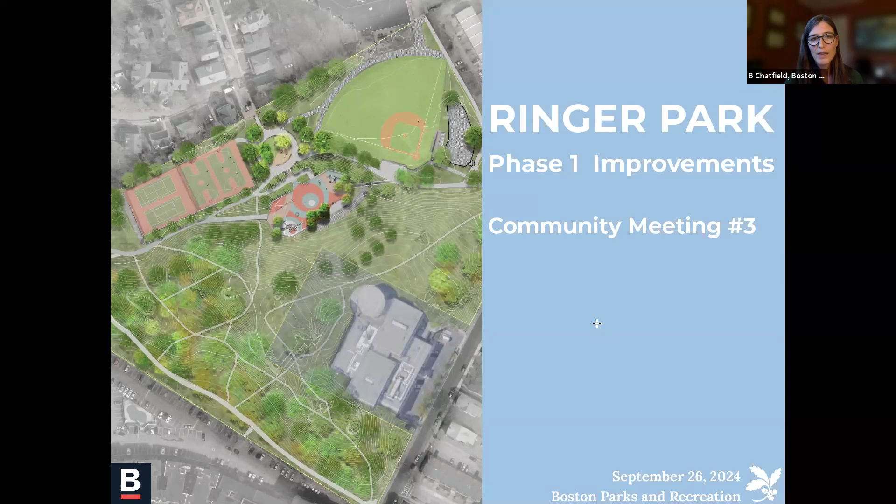So after we discuss the scope already shared in the first two meetings - if anyone's new and has reactions, that's the first third - we're going to have responses after that. Then after we show some new ideas for layout, we'll have responses again. And then after our playground options as well.

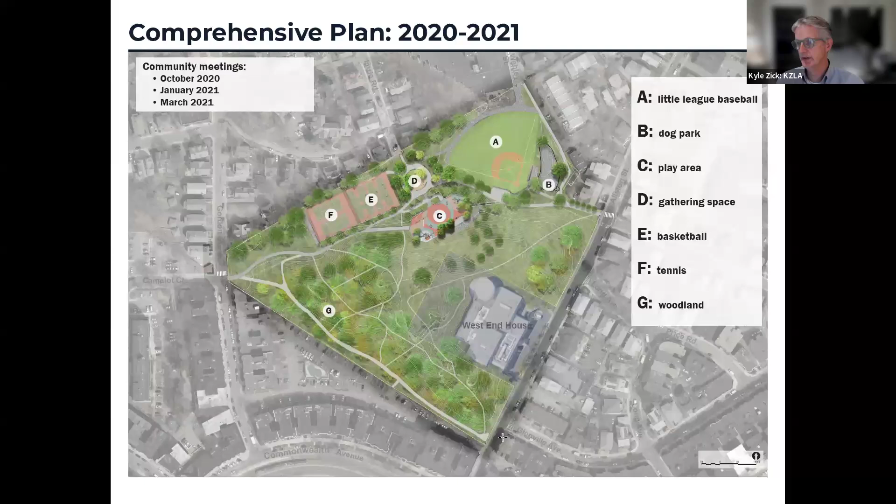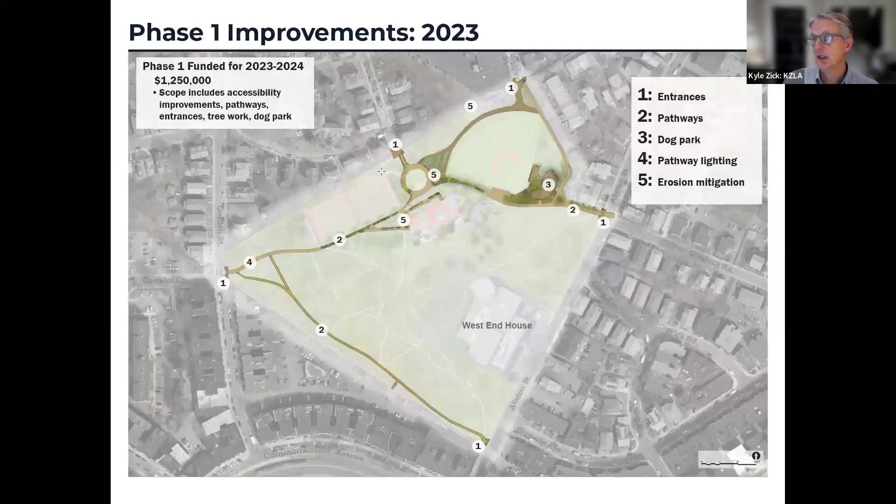And the thing I should also point out is it included pathway lighting along this primary path, and some erosion repair and tree work, because as you all know, there are dead trees and trees that need to be pruned. Now, as Bea already mentioned, additional funding has been secured, so that budget is bumped up about $1 million, and that allows us to do more. I think we're still looking at the entrances and pathways, but now we're able to talk about the playground and this field. And we'll still talk about a dog park, but we'll talk about alternative locations.

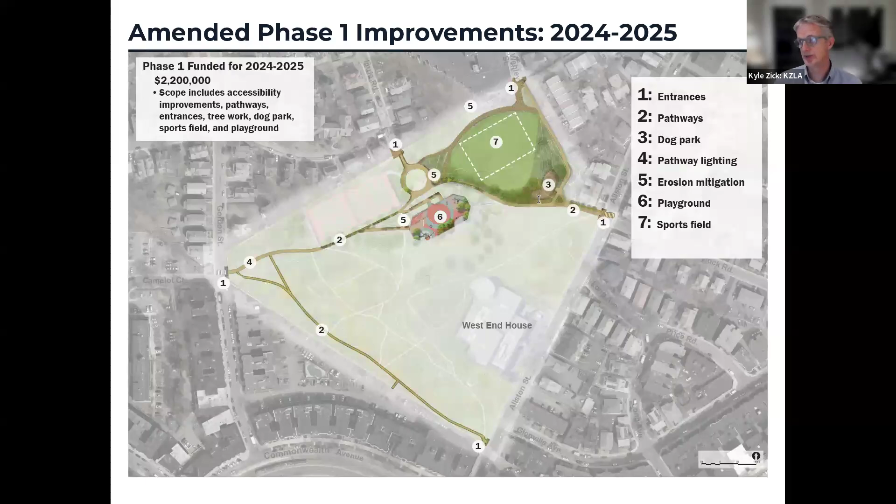So just to reinforce what that scope includes, it's all the entrances to the park: the two entrances on Allston Street, Webley, Imrie, and Gordon. And those improvements involve accessibility, legibility, and just the quality of the materials and walking surfaces.

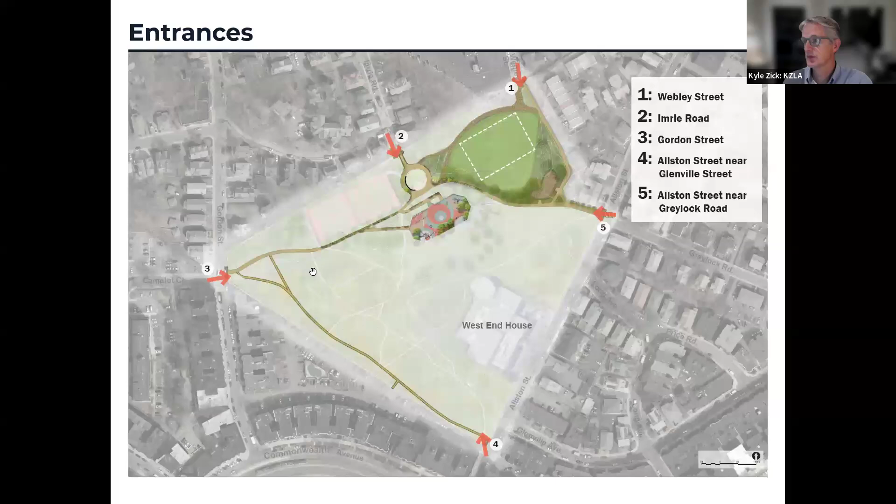At Imrie, there's a small pier that would be added to help identify that location. We're talking about having some stone edging or curbing to delineate the walkway. And we'll talk about the gathering space next or soon.

At Gordon Street, the primary thing there is the path is being realigned. Today it goes up the hill, which isn't accessible. So what you're seeing there in tan takes you to the woodland area, but what's gray hooks a left and stays downhill, and that would be an accessible route that would gradually build up to the path uphill of the tennis courts. Then at Allston at Glenville, we'd have a gate that could control access. And Allston near Greylock, we're shifting a little bit away from the abutter there and improving some of the materials.

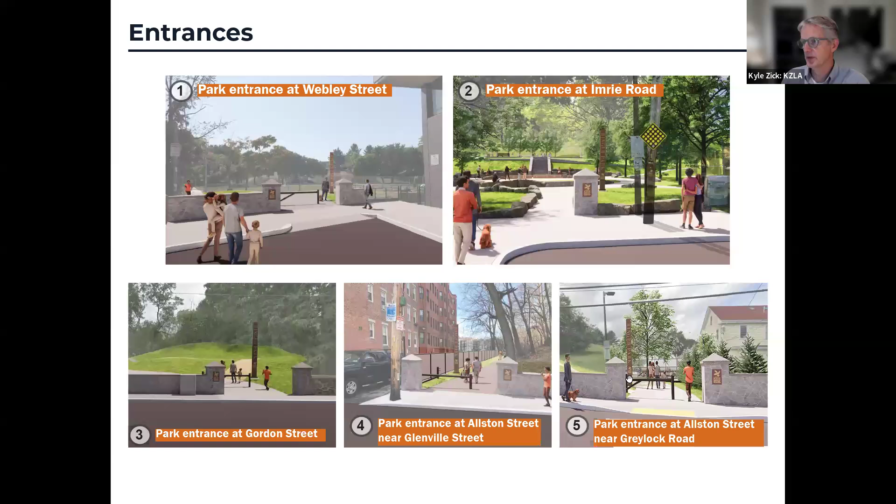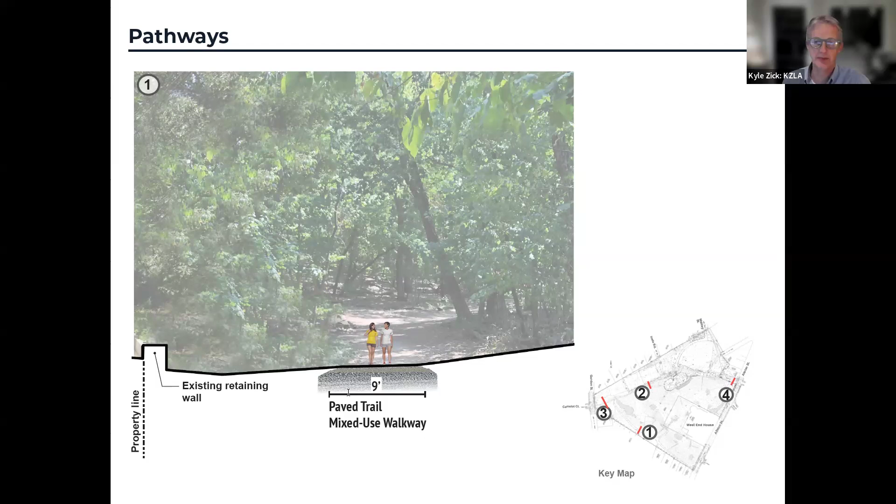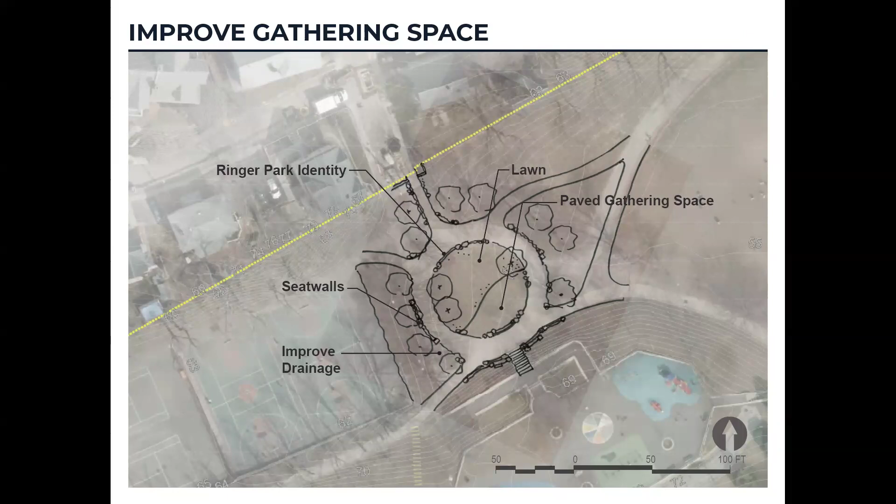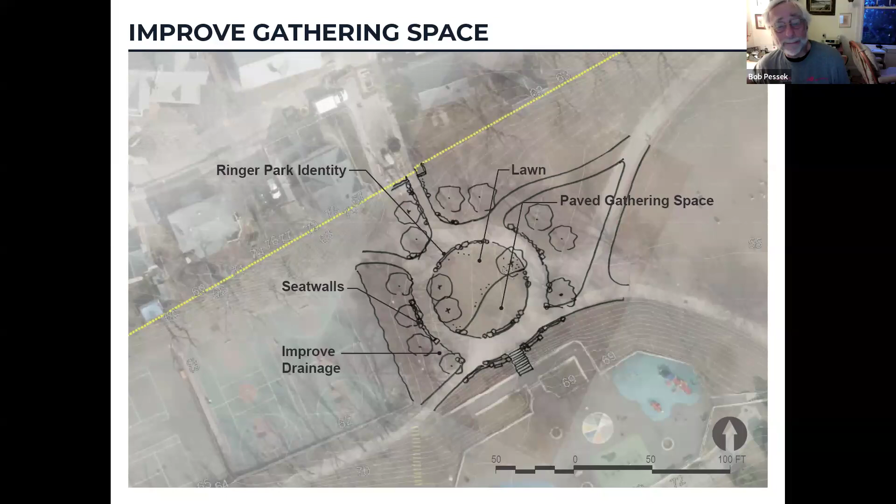Thank you. I just want to add about court lights. I've lived across from the park for almost 3 decades, and dark or light, if it's not raining, there'll be people playing basketball all hours, with or without lights. Some time ago, there was a move to add lights there, and I think there was a petition that went around the neighborhood to ask them not to have lights, because for a short time they were on, and it actually attracted a lot of people that weren't playing sports but just hanging out. So I wanted to add that. And the Vikings might be good guys, I have nothing against them, but they wrecked that circle. So that's the fact of the matter. And if we want that circle maintained, they're going to have to go elsewhere. Thank you.

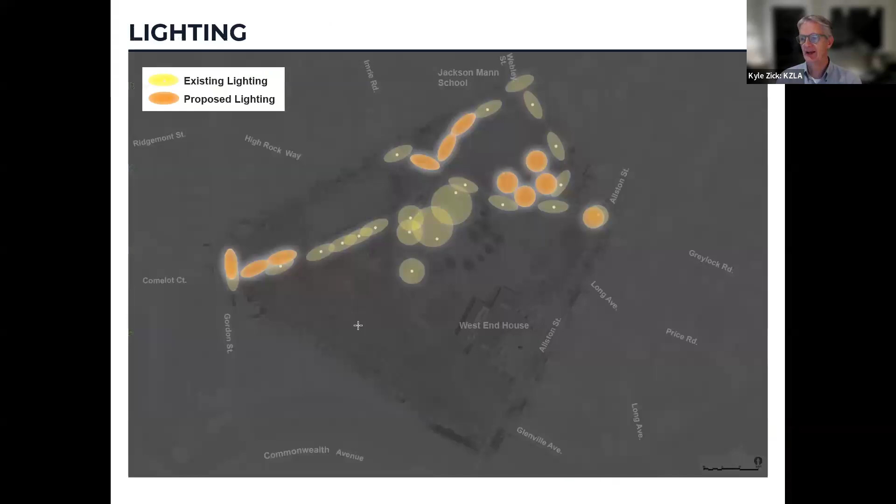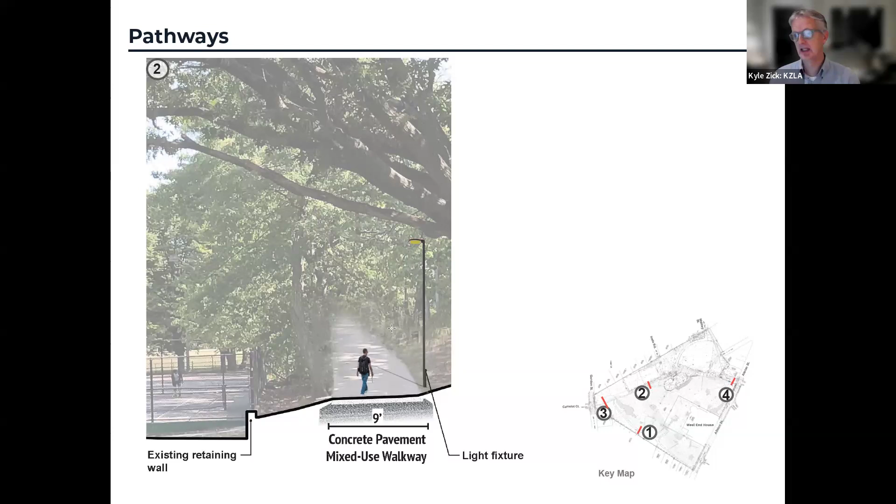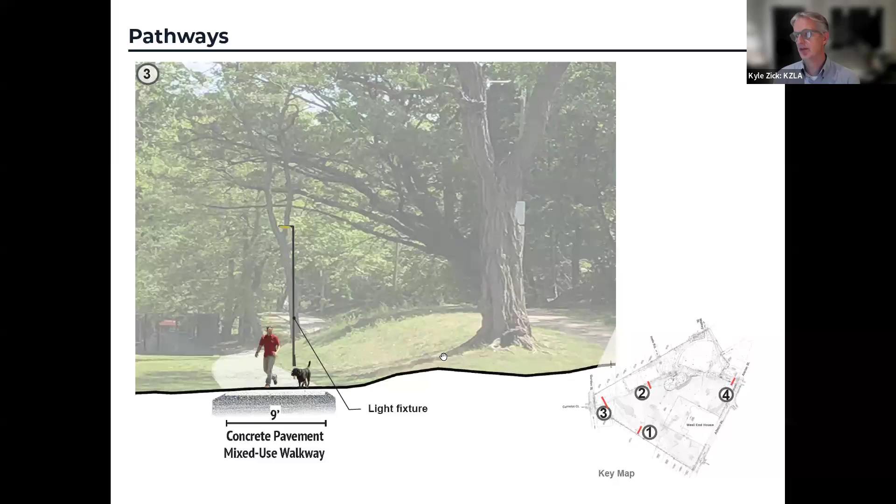Yep, we are widening. The existing paths aren't all consistent. So if I stay on some of the things that are already paved, I think you're less than 7 or maybe 6 feet uphill at the tennis court. That's where we're saying the maintenance vehicles break the edges, or sometimes they can't even get through. So we would be widening to 9 feet and consistent on that main spine from Gordon to Allston. Now the other paths that aren't the main spine we'll look at differently, because they might not have the same amount of traffic or same needs. So that's something we still have to study.

And I think we're trying to balance maintainability while also not welcoming people zooming through on scooters. We're trying to talk to our maintenance team to figure out where they really need to go. So maybe there's a hierarchy between the 9-foot concrete paths intended for truck use, and then maybe some narrower paths. I think the path through the woodland would probably be narrower, trying to respect some of those tree roots in there. We wouldn't want to put something too wide. But yeah, that's a good point, and that's in development basically.

Okay, I see Samantha Fletcher you've raised your hand again, so let's hear from you, and then we'll keep moving on. Sorry, I have one other question. I'm wondering about water and water fountains. Currently I think there's one by the playground and one towards the baseball courts, but I'm wondering if there could be one closer to the basketball fields or anything like that. I was wondering about some of the plumbing.

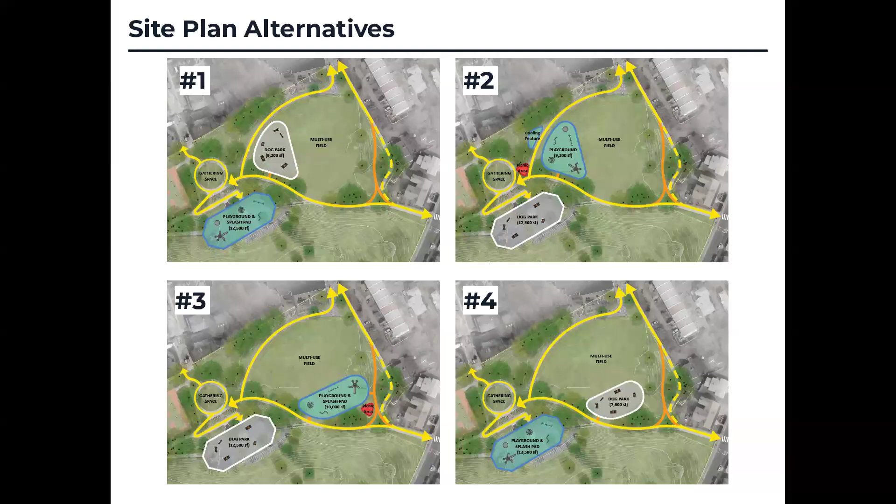That's the goal. On the entrance ways, the challenge is to make it both accessible for wheelchairs and also prevent motorized traffic, because usually if you can get a wheelchair through, you can also get a scooter or a bike through. So we can't fully armor against bikes, because that would mean we'd only be able to have upright people on two feet sliding sideways through a vicious stretch of bollards. So it's really about designing it in a way that doesn't look like a really nice cut through.

Maybe that's something we can look at - perhaps some pavement textures, or placement of boulders amidst paving by entrances, so that straight shot isn't encouraged. That's a good point.

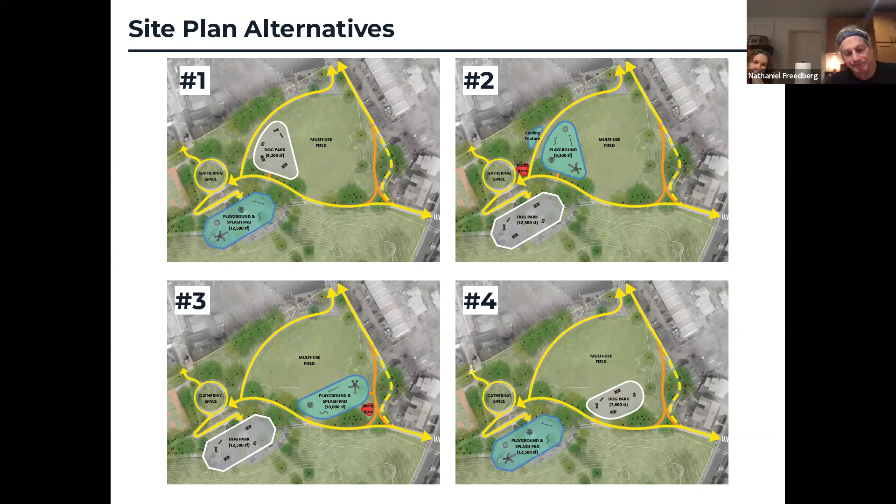Rob, are you a co-host now? There was an issue with him not being able to connect. Oh, but can he be unmuted? No, he wanted to be a co-host. Are you sharing your screen, or is he okay? Okay, no, we're good. Share. I see a thing that says Rob. There we go. All right, sorry, unmuted. Awesome. Hi everyone, my name is Rob Barella.

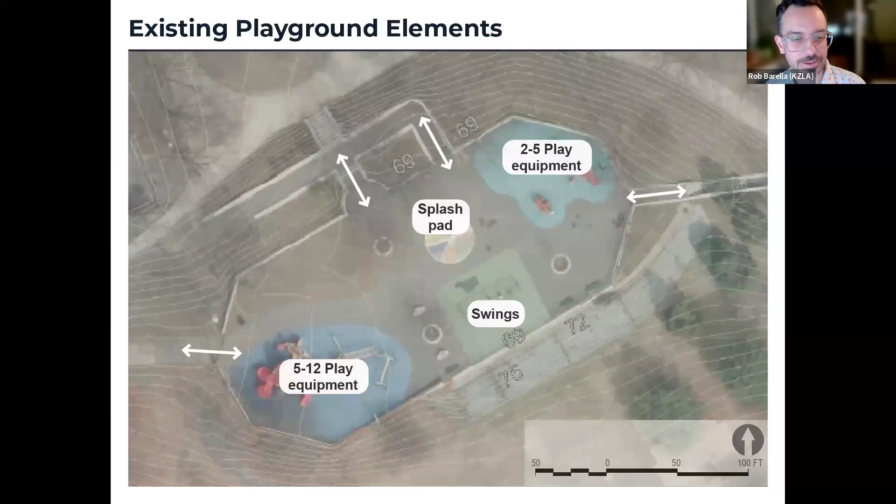I will walk through the playground now. To preface all of this, I know there's been good comments about accessibility and being inclusive, with access to the playground, and then also once you're in the playground, to equipment, to furnishings, everything like that. Regardless of the location, we will be providing accessible routes to the playground, and we'll have different equipment for everyone with a wide variety of different abilities. So that's kind of overarching for any playground scheme.

Now, we've already covered the existing playground during past meetings, so I'll do just a quick overview. Basically what we have is a few main things: we have 5 to 12 equipment in that big structure, we have the splash pad, we have some swings, and then we have the lower 2 to 5 equipment. There's a few furnishings through there, not much shade, and the layout has a lot of space between the pieces of equipment. So we're going to start looking at that layout, making it more efficient, really taking advantage of the space, and trying to give it a little more play value through different means of play. Next slide, please.

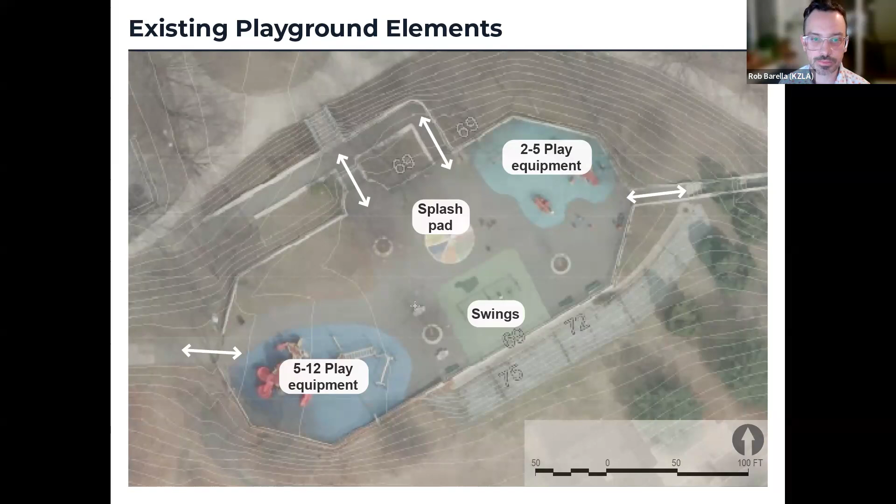So here are some photos of what we have going on out there now. One thing I'll point out: it feels hot because it is. So we're definitely going to be looking at some shade options, looking at removing some of those poor trees in those tight grates, and then looking at some updated play equipment for both 2 to 5 and 5 to 12, and everyone else in between.

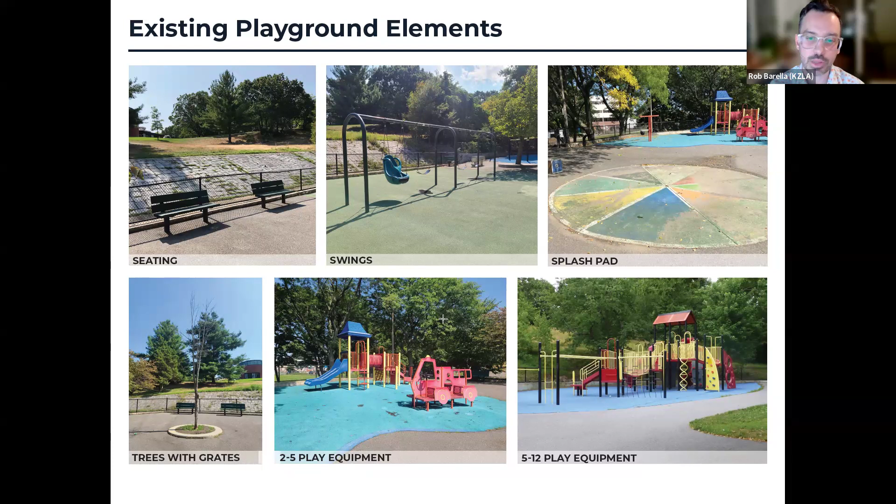The thing I would add to this is it was part of a multi-question survey early on in the comprehensive plan that asked questions about the whole park. So we weren't diving in specifically about the playground — we wanted some general comments.

I've advanced to the next slide, which is the playground program. Okay, I think this is the one that Rob was unable to see. I can handle it. Yeah, so in terms of the existing program — I'm unfrozen now. We're good. Oh good, all right. We're good, all right, back to it.

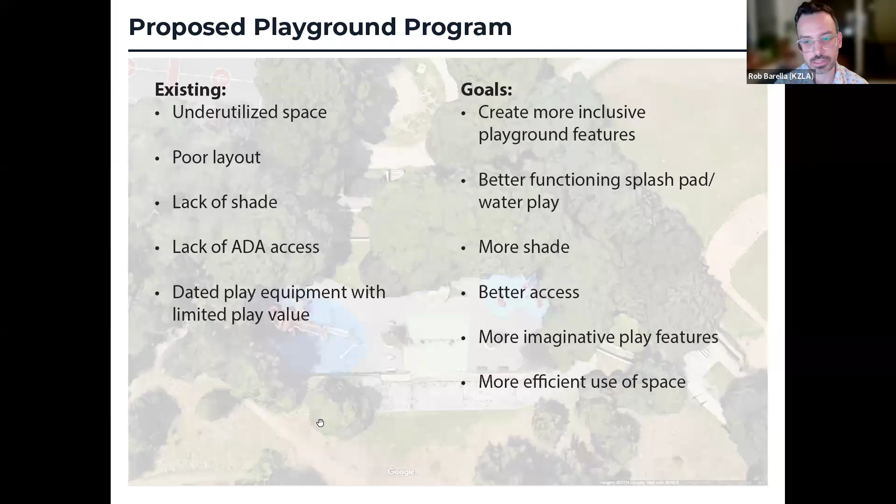Okay, so I'm going to start showing some examples. Again, it's non-dependent on the location of where the playground is. This is really just trying to give you a sense of the wide world of play options out there. We're breaking this down into kind of playground characters, so what you think might be best suited for this space in Ringer.

I'll start on the top left, where we have the post and platform, which is quite literally posts with platforms, something that is fairly typical in playgrounds. So we have that kind of style of play structure.

Next we have climbing, which might have more ropes or more climbing panels. Sometimes those are more appealing to older kids, especially for upper body development and dexterity.

Next to that you'd have combination play, which could be a hybrid of some posts and platforms and slides and some rope climbers. The bottom left is a little bit more of an adventure course, if you will, where it's more linear and you just have more of a route that you can adventure through.

The bottom middle is potentially inspired by Vikings with the ship, but otherwise thinking of imaginative play—what could these structures maybe look like. And then to the bottom right, exploratory. That's really like the course: you're going out, having moments of discovery, finding new things, and it's a bit more of an adventure as you're navigating the play space.

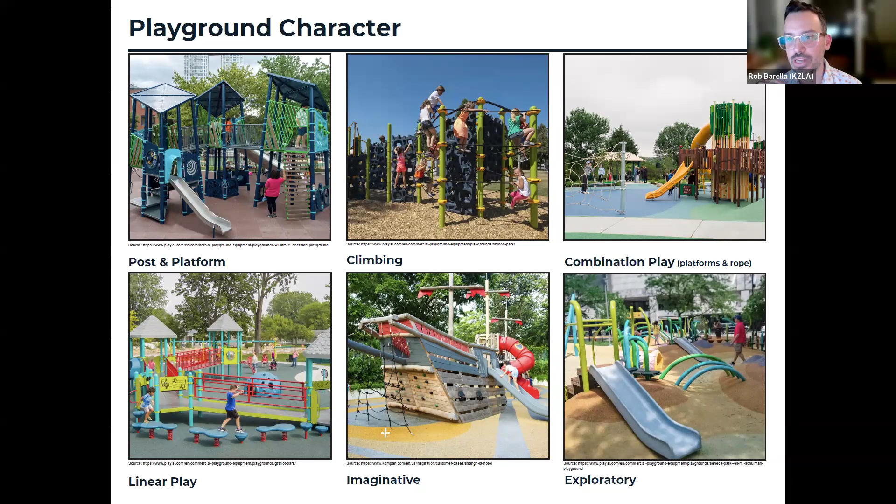Okay, next slide. As I mentioned too, there's a lot of different types of play. Sometimes it's structured and sometimes it's not. Our goal is trying to incorporate a lot of play value in different forms, and that relates to our goal in creating a more inclusive playground through various means and different activities.

With sensory play, we think about gross motor skills and all different things through smell, through feeling, through audio, and everything else. So we're looking at a variety of other objects and activities that could increase the play value in the playground—could it be musical or other types of motion, something tactile that you could feel, some other visual components, or something else auditory related.

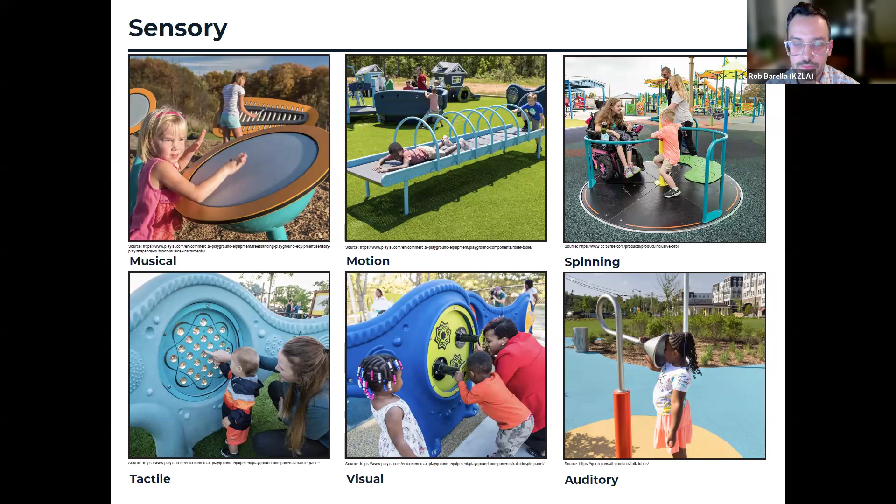Okay, next slide. Then the splash pad. Splash pads can mean a lot of different things. We like to think of the idea of also having these be multi-generational. I think a lot of splash pads have this connotation that it's kids play only, but in a sense where we think of cooling as an amenity, we are being mindful of what we can do to have this be a little bit more multi-generational. On the top left, you have spray features that would be out there.

And the middle top, you'd have your simple water jets, which are great because those are flush mounted, and when they're off, now you have a space that could be used for performances, because it's essentially just an open terrace.

We could look into misting components, which are certainly fun with clusters of them, but also going back to that multi-generational sense—it's cooling, but you're not going to get really soaked with those. The bottom left is the same idea with misting.

The bottom middle is looking at more of that exploratory or imaginative style of splash pad. And then on the bottom right, more of the water play tables—something a little bit more hands-on.

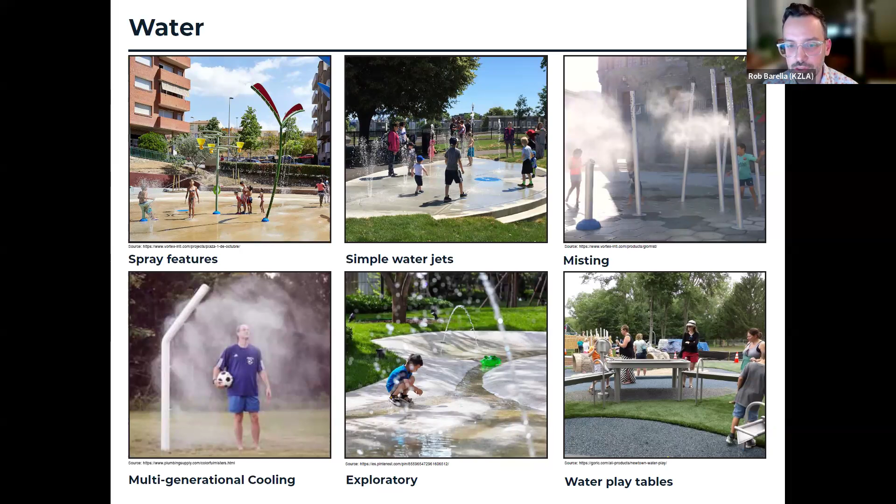So I think we'll shift gears. We'll talk about one slide on dog park components, and then we'll open it up for questions.

We've talked about some of the design criteria for dog parks in terms of size—we're shooting for about 10,000 square feet, but as Bea mentioned, particularly in the city of Boston, we are sometimes smaller than that. Still, 10,000 will be about what we could fit here, depending on the location. Bea also mentioned we want to be 100 feet away from the residents, the buildings themselves. Any of the locations we were showing tonight meet that criteria.

We'd have fencing that would secure the dog park, with a double gate so there would be extra security so a dog can't mistakenly or accidentally get out. For surfacing, I mentioned pea stone—I know in the chat there were some thoughts on that.

There's a lot of variation in stone. There's rounded pea stone and angular stone. The angular stone generally is harder on paws, and pea stone is cleaner and easier to clean up than some of the sharper stone.

We would have access to water, so a drinking fountain that has a dog bowl, but also a hose bib so that things could be hosed down if needed. There would be furnishings, accessible seating, and we would like to have shade. And if we have some of these agility features, the ramps and hill climbs, that's something to discuss. And of course, there would be waste receptacles, waste bag dispensers, those kind of things.

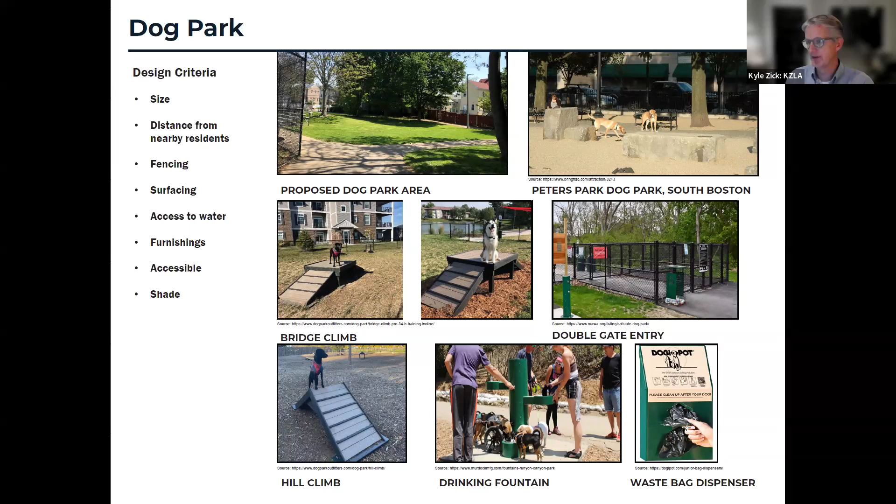So this is a point for us to stop, and we can talk about these things specifically. We would love to get input on what Rob mentioned about the playground, but we can also talk about everything you heard tonight.

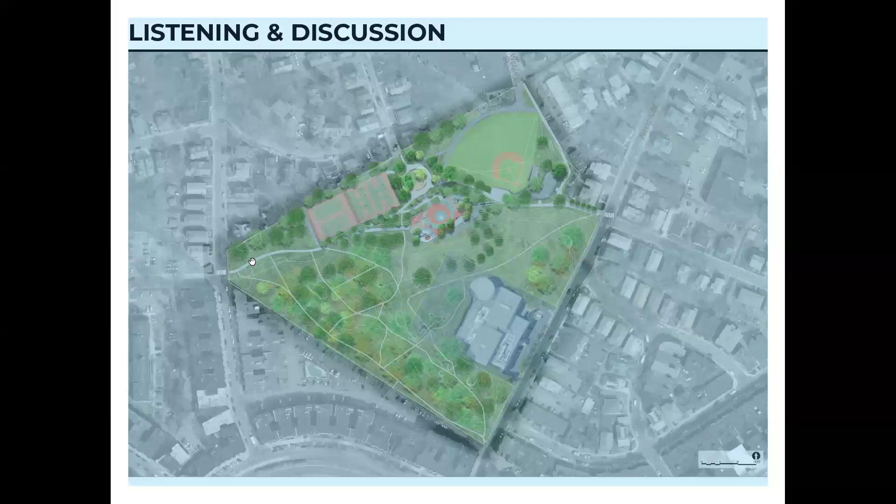And I think Councillor Breadon raised her hand. Just to let everyone know, we are having a city council hearing on programming at the community center. They had planned to go to the high school, and then that plan was scrapped, and there's been a lot of confusion. So we really want to talk to the community about programming and what sort of programming people would like to see in the community center. So we're having a city council hearing at the community center on October 29th at 6 p.m.

And we'd love it if we have a very engaged group of people here tonight who live in the immediate area. We'd love to see as many people as possible come along and share their ideas about what their vision of new programming for a community center would look like, and also what a new community center in Allston Union Square would look like. I encourage everybody to engage with this. It's an exciting opportunity to envision what a new community center would look like in Allston Brighton as well. Thank you.